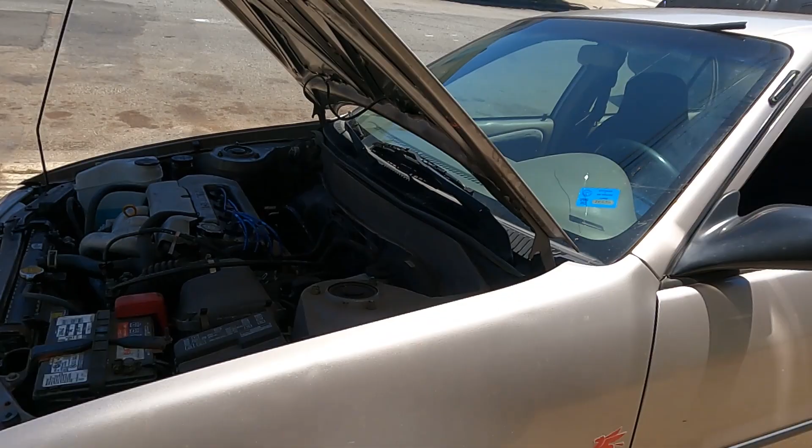Today I'm working with my brother's car. It's a 1998 Toyota Corolla CE. This is the car. So basically on this one I'm gonna replace the power steering pump and also the high pressure power steering hose right here. This one right here is the whole assembly, and the power steering is also leaking all the way down there. So I hope you guys can see it.

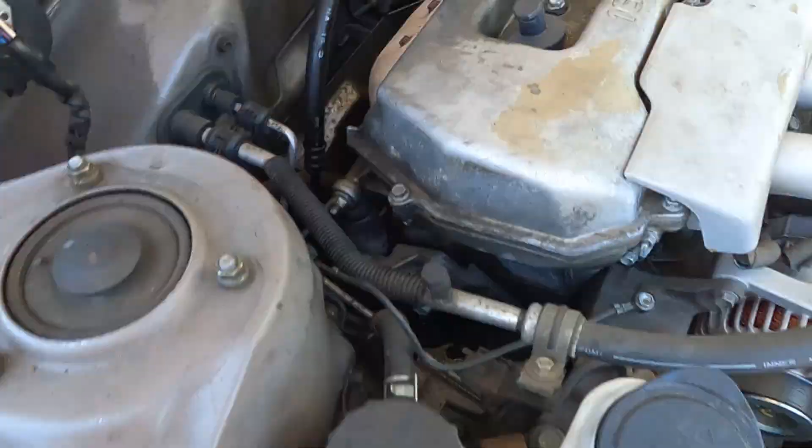Right now the car is hot, so I'm going to let it cool down. First, I'm going to take out the heat shield for the exhaust and also another heat shield from the firewall down here, so I have access from here, and then you'll see all the parts. Next up, I'm gonna loosen the nut or the bolt right here that's connected to the rack and pinion.

Okay, and I'm going to show you the parts. This is the pump. I got it from AutoZone. This is the part number right here, and here's the whole power steering line or the high pressure hose, and here's the part number from Toyota. This is the whole assembly. They don't sell just one piece. They're really expensive, guys. And here's the part number. I'm gonna put everything in the description later.

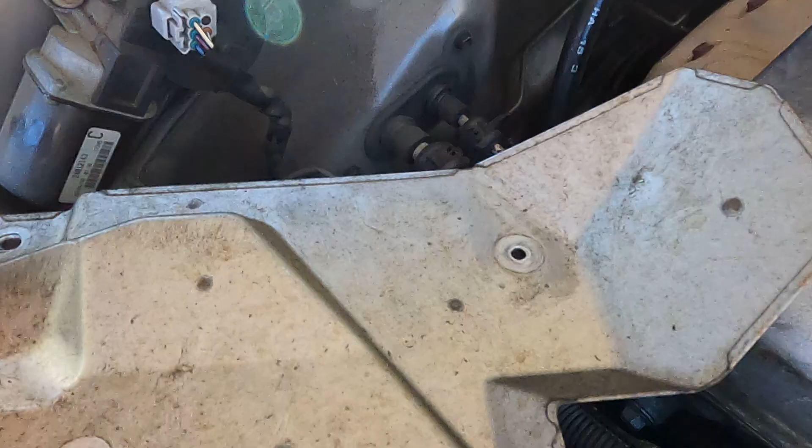Alright guys, this is 10 right here, down there 1, 2 and 3 on the bottom. I had to take it off. Okay, so now I take this one, the shield, and there's another one. So 1, 2, 3, 4, 5. So there's like 2, 1 and 2 right here. Those are the bolts for this exhaust heat shield, and this is 12. Alright guys, so now I took off the heat shield down here.

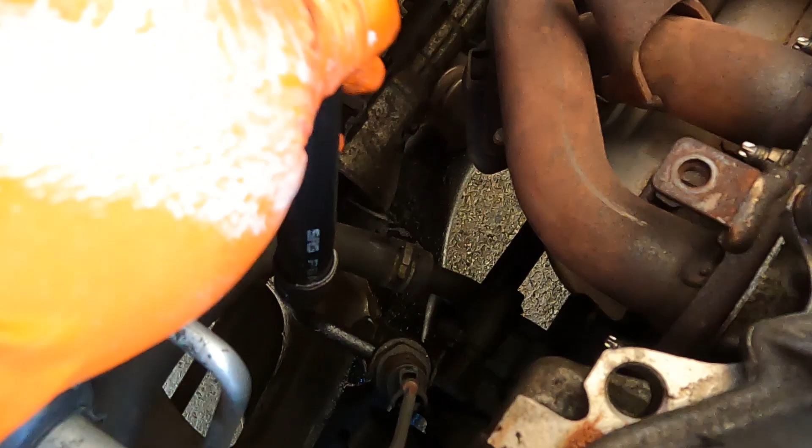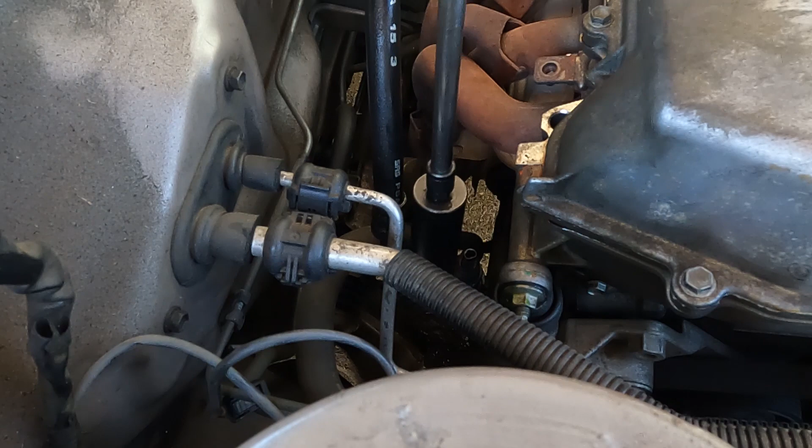That's one. So now unplug this sensor right here and loosen the nut or the union bolt, and then you can take off this one. Just be careful because sometimes they might get brittle. This sensor right here, put it on the side, and then I'm gonna find out what's the bolt size for this one. Hope you guys can see it. The size for the union bolt is 24. Okay, it's 24. Trying to get my long ratchet so I can break it. Okay, now it's broken.

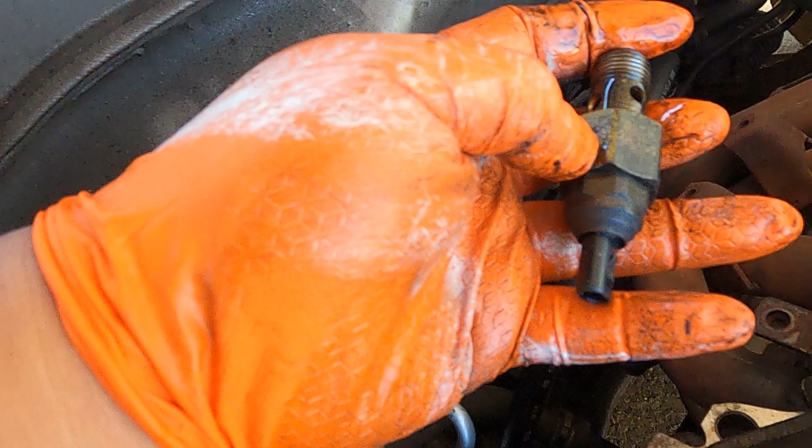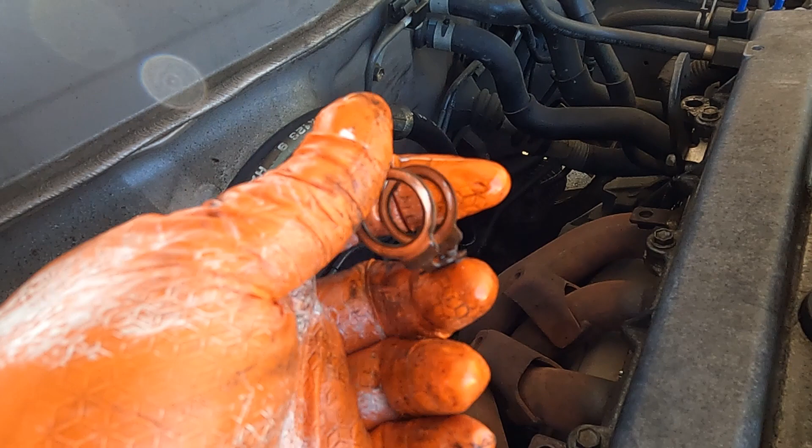Get your pan ready underneath because it's leaking. So I'm getting the union bolt right here, that one right there. Get your catch pan ready. Okay, that one right here is the union bolt. I'm gonna find out also what's the torque on this, very important. And then on here, very specific. This gasket right here, it's the O shape right here. It's only one time use. The dealer told me, so I got this one time use only, copper.

Now I have to disconnect these hoses. It goes to the reservoir right here on the bottom, and then on that side I have to disconnect only one side. I have to disconnect the bolt or the nut. I forgot what they call it, but first I have to disconnect this hose first. And then next up I have to take off the belt. Okay, that one. Alright guys, gonna take off the clamp.

I have to put a little bit more of the WD-40. Then break that in, take it off the hose. Okay, so now I take that off, move it as well, so it's not in the way. There's the bracket down here, and then one over here, so it's not in the way, it's not gonna bother me. There's a 10mm bracket down there. Now it's all messy, and then the bolts for the pump are underneath. There's two, so the head is all on this side underneath the exhaust manifold.

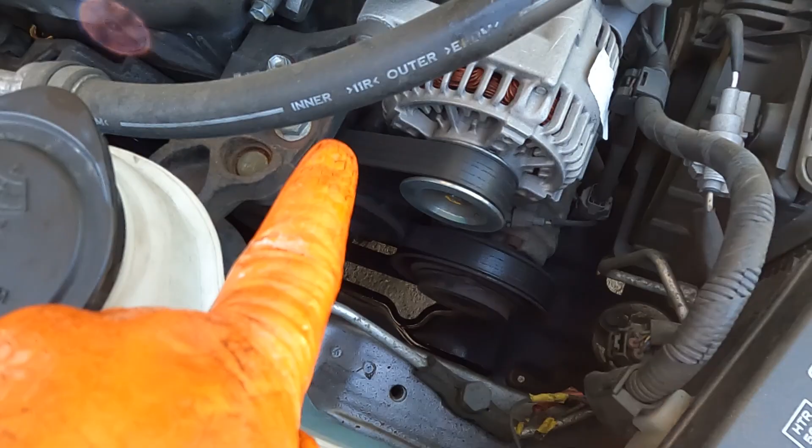Okay, what I'm gonna do, I'm gonna take off the belt first. So I'm gonna loosen the tensioner first, and then take off the belt. And at this time it's better to check the tensioner. So I heard this one, the pulley, did you hear it? It's not supposed to make noise like that, meaning the bearings are already worn out.

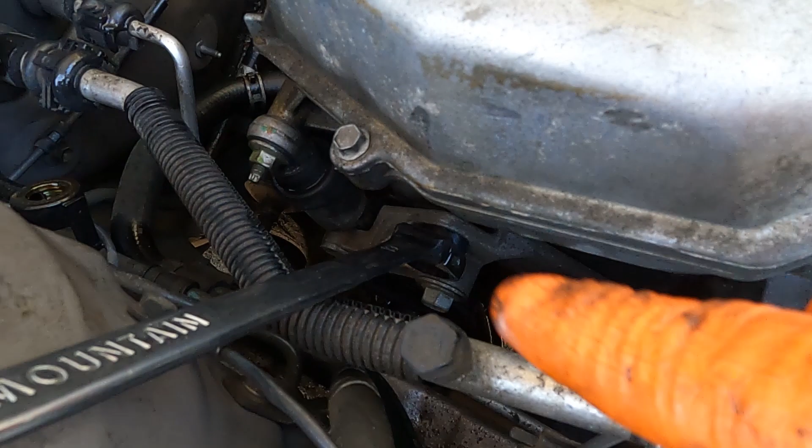So this tensioner is expensive, it's about $100 something if you get the whole kit with the belt on it. And then check the water pump, if it's gritty or if you feel vibration or something. That's the best time to check everything.

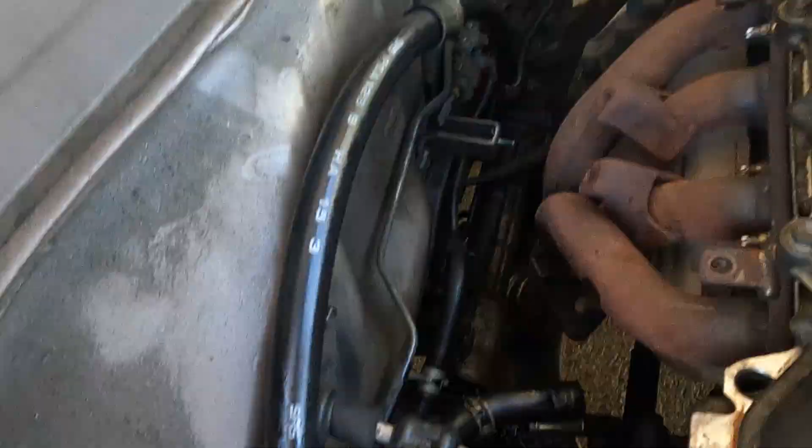And now moving forward to the next one, you have to loosen the nut over there. I think it's 17 or 18 or 19. I will show it to you, but first I have to take this one, just to not be in the way, or I can just tuck it in somewhere. Maybe just like, there you go, maybe just like that. Okay, so the whole kit is like this.

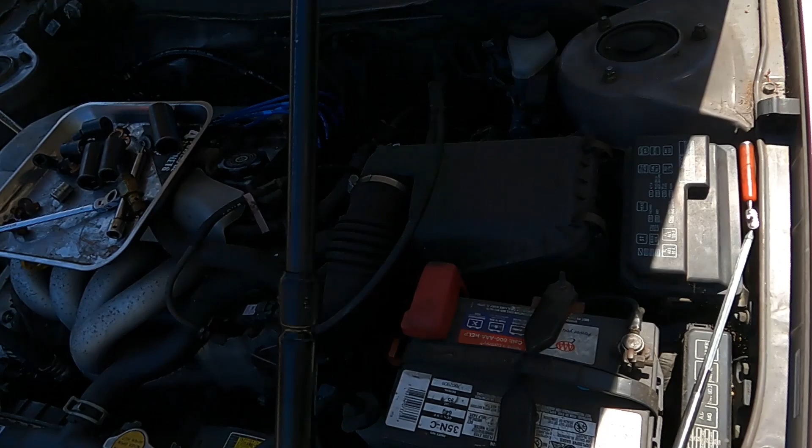So you get the long one that's connected to the rack and pinion, and then there's a pipe right here. So you just have to disconnect the hoses from here, and I'm gonna show you where that is. It's from here, that pipe right here. One, disconnect this hose, and another one down there, disconnect that one. I'm gonna get my flashlight so you guys can see it. I know there's the glare or the shadow, but I'll show it to you.

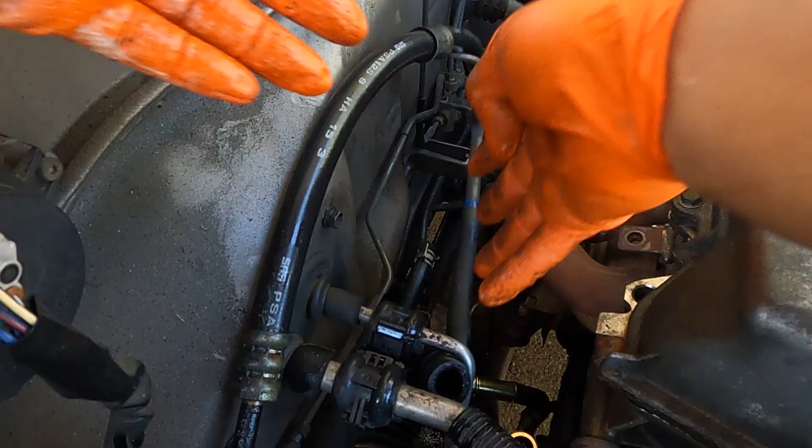First we have to disconnect this one, take off the clamp. Disconnect. Okay, come on. Okay, that one. Now there's another one down there. The valve cover is still kind of hot, so I just have to get it in. This piece right here, I hope you guys can see it. This piece right here,

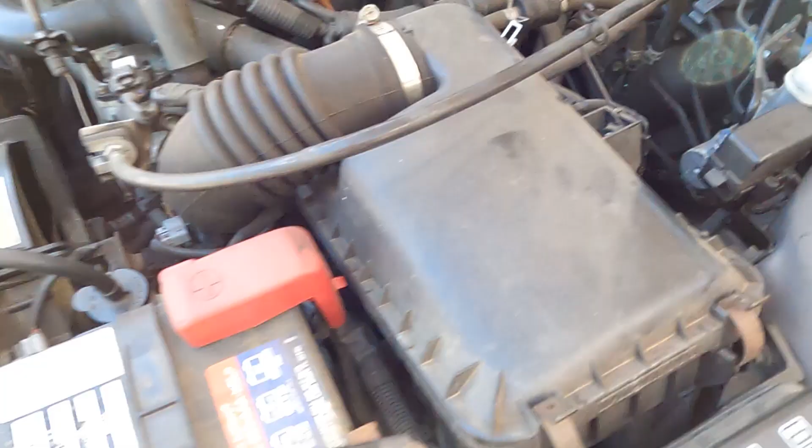that piece right there is 17 millimeter. I have to break it in. It's kind of tight, but I just have to look for some ways to break that in. Okay, and then it's easy, take it off. So for the power steering hose, there's three 10 millimeter. There's one right here, and then there's two over there. Once you break the nut on the, oh no, from the rack and pinion, sorry. Once you break that in, it's easy to get the power steering hose assembly.

And now moving on to the power steering. This piece right here, it's already loosened. So now I have the, oh you mother, I already broke it in. So now I just have to work it out with the midget wrench, just to work that in. Once you break it in, so you can break it in with a regular size wrench.

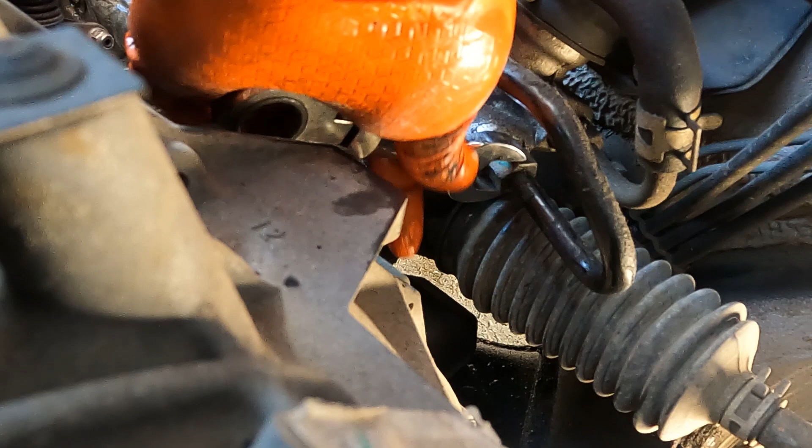Still. Once we get this, I forgot what it's called, the bolt right here. Come on. I have my angled one. Hopefully this whole, no, it's too long. I mean the midget one is the perfect one.

Still, come on. So once this one is off, we can just take it off. There you go. It's already off.

First, before we take off this one, I'm gonna loosen the three 10 millimeter here that I have to take off. This hose. I just have to take that off. So this one, one 10 right here. Okay. Two more, sorry. One right here. This hose is kind of giving me a hard time. This one right here. So what I'm gonna do, I'm gonna take this one off.

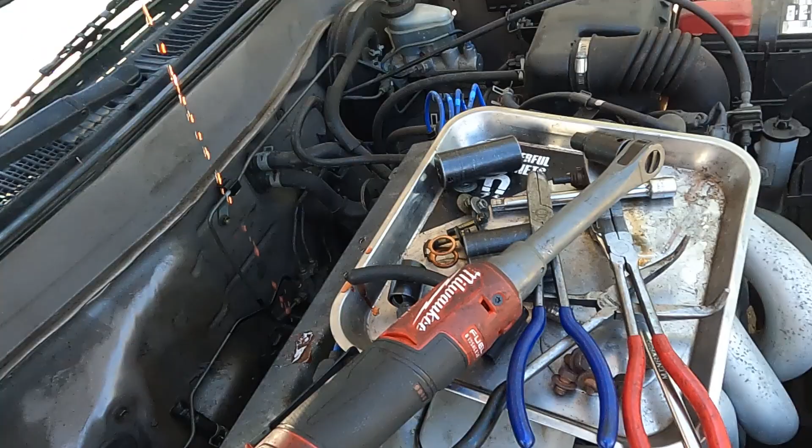Okay. And then just have to take that off, and then get to that. Okay, I see. There you go. Now I have to catch the power steering, right here, the whole assembly. I'm sorry, it's only two brackets for the whole assembly. Oh shit. Okay, to be quick. One right here is the whole assembly.

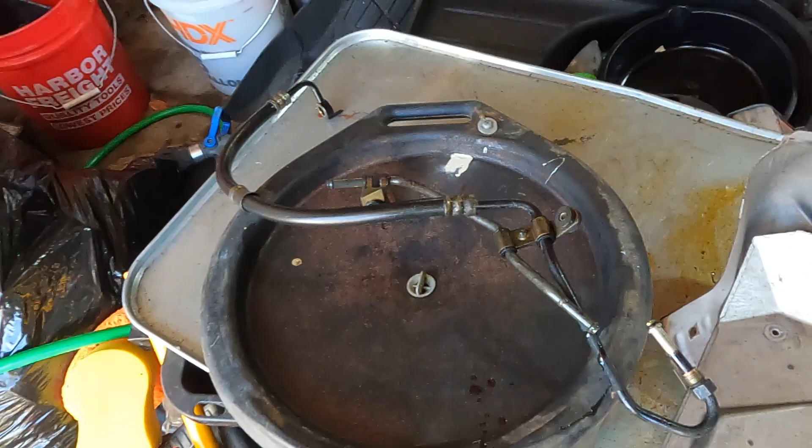Now I have to clean it, jack up the car, and then work on the actual power steering pump. Okay, this one, and I'm going to spray some cleaner here later once everything is clean. Okay, so I'm done pulling the power steering pressure hose. Before I jack up the car, I'm just gonna show you there are only two more bolts holding the power steering pump. Before I go down there, I know there's a lot of fluids that have been leaking.

Don't forget to get some eye protection.

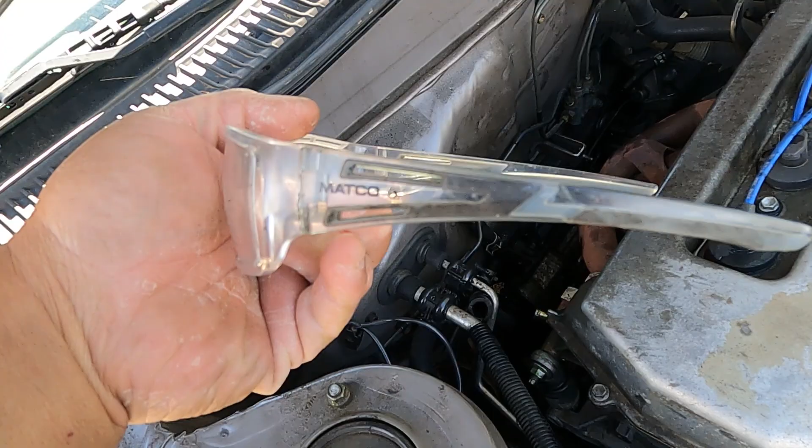All right guys, let's just go back to work. Let me just jack up the car.

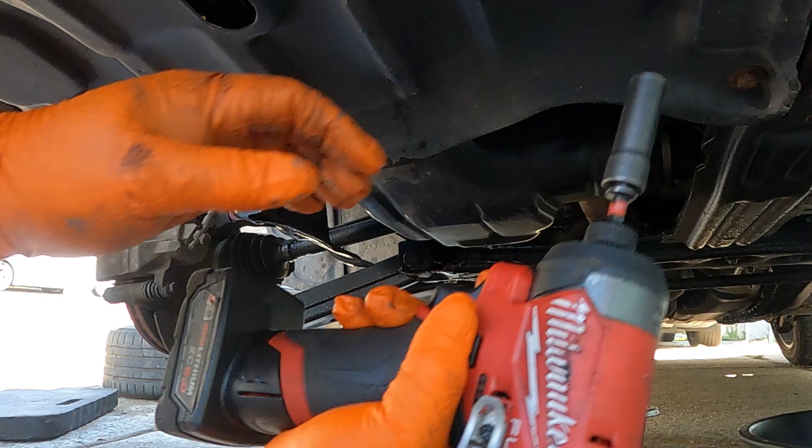Alright, so on the bottom, I just wanted to take off this plastic cover. So you got them right here, 10mm right here, so I got more space to work on. Two more.

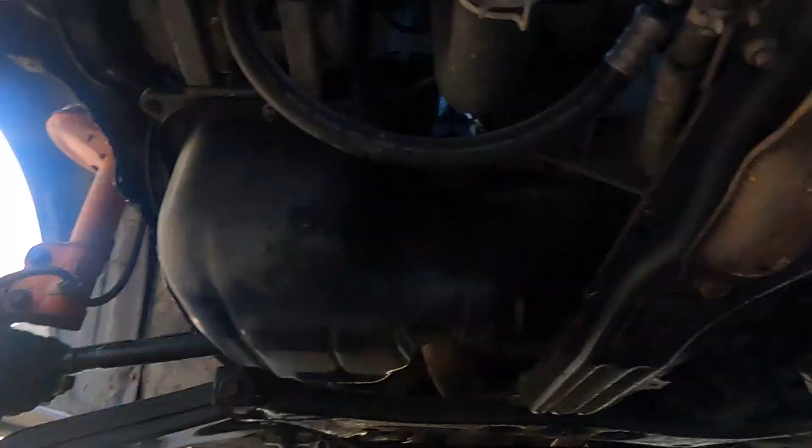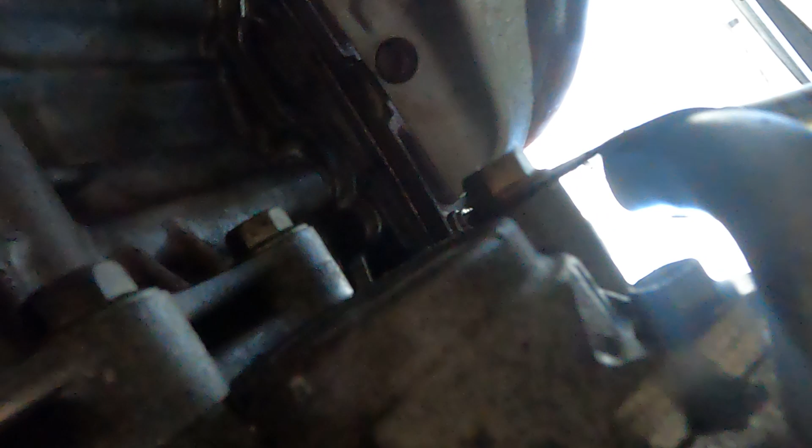Check it out. Over here there's one bolt down here, and then I know there's one bolt up here. I think the head is all the way to the end. Okay, it's right here. You can see it. One over here, one here, one over there. Okay.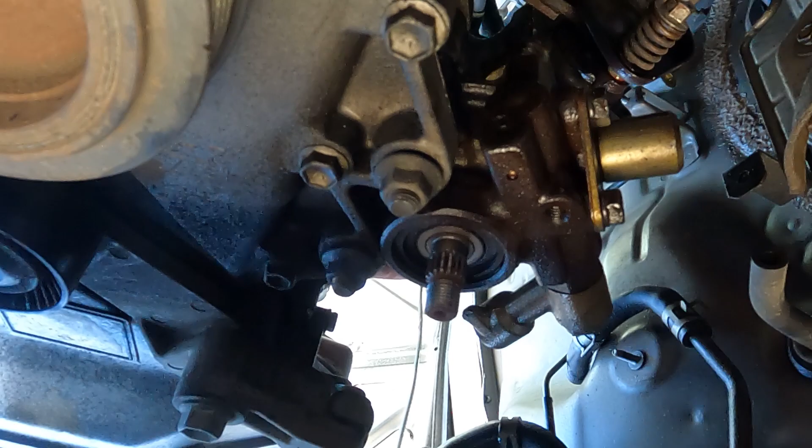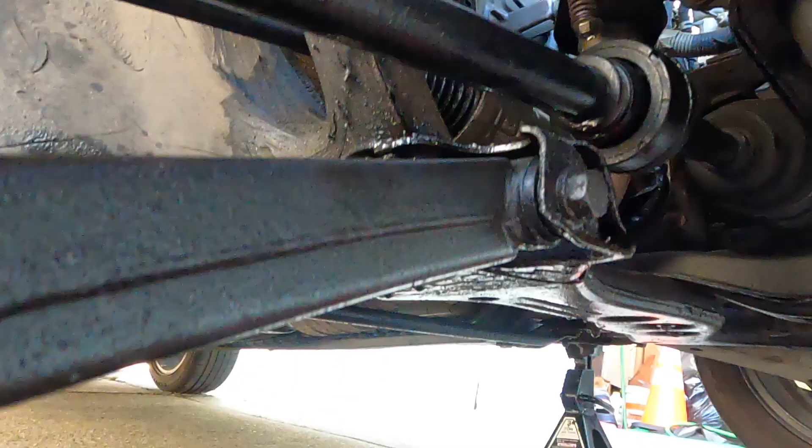Alright guys, so this is what I'm trying to show you. One long bolt, there's the second one, and then there's the nut right here, 14, and then the pulley 17. Let's see if I can. Okay. Oop.

Now I know I'm ready to take out the power steering pump. I think let's just leave it tight, and then be careful. Might have some fluids, like the power steering fluid. I don't know why I cannot get through. Come on.

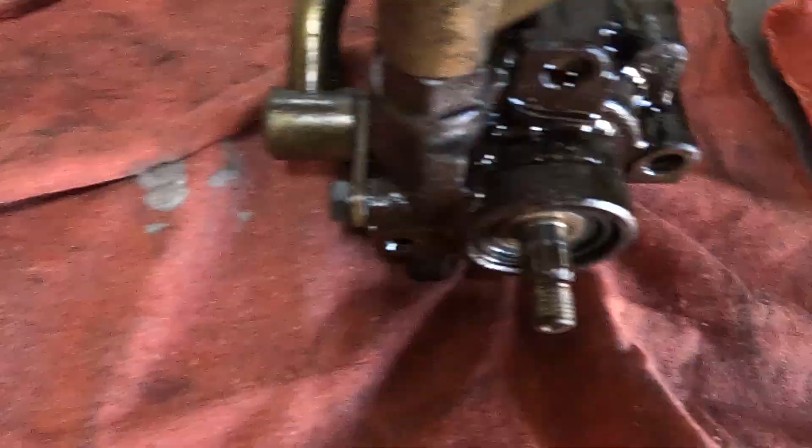Okay, here we go. And I'm gonna show you the new one. Okay, so here's the old one and then the new one. So first I have to transfer all the piping, this one and this one, from the old one to here. I'm not sure what's the torque for this one, so I'm gonna check all data first before I transfer, because I don't want to waste the job or the gasket from here.

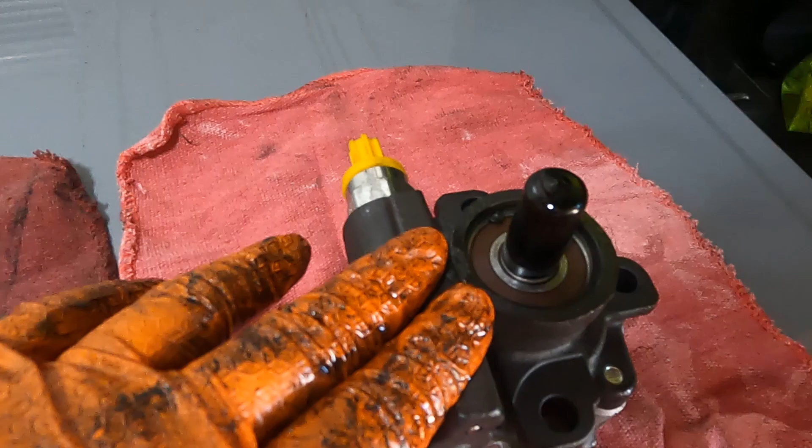AutoZone sells the whole assembly with the piping, so basically plug and play. This one is cheaper. It's like 100 plus, compared to the complete assembly with the pulley and everything, which is around 300 plus, I think. I forgot, so I'm gonna check that too on the link, where you can get the whole assembly versus just the bare power steering pump.

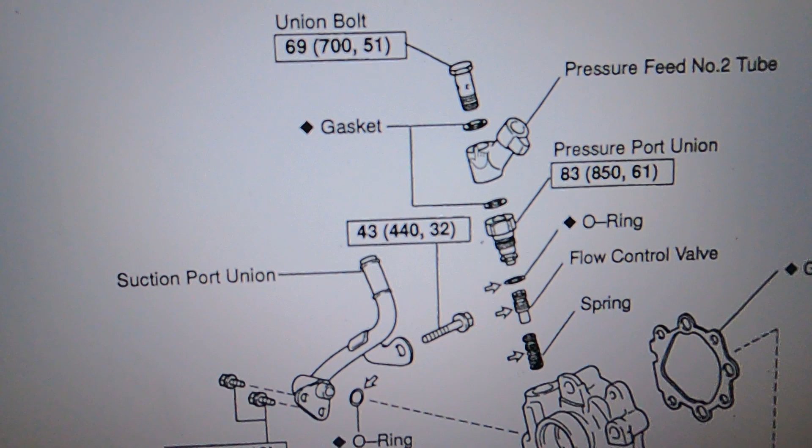Okay, alright guys, so I found the torque. The pressure feed tube number 2 right here, and then this is the union bolt. From here it's about 51 foot-pounds, and then the suction port union tube is right here. There's 2 bolts right there, small ones, 10 millimeter. I think that's 10 foot-pounds, and then I have to replace the O-rings and stuff.

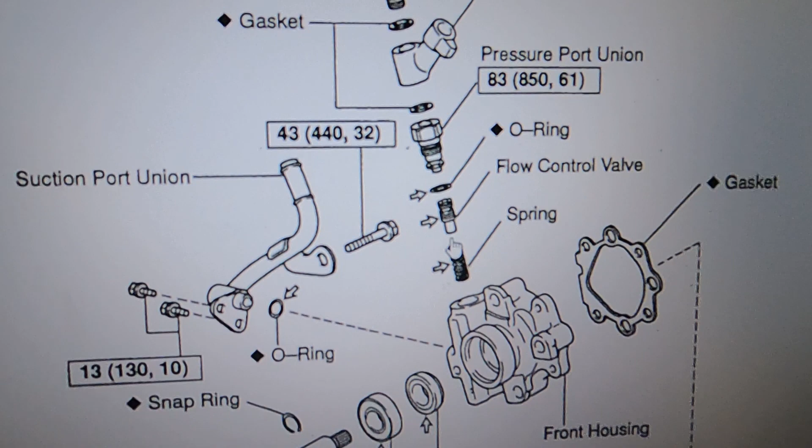So the pump I have already has this pressure port union, so I don't have to worry about this part right here. The only thing I have to worry about is this part right here, this part, and then the union, and then these are the gaskets.

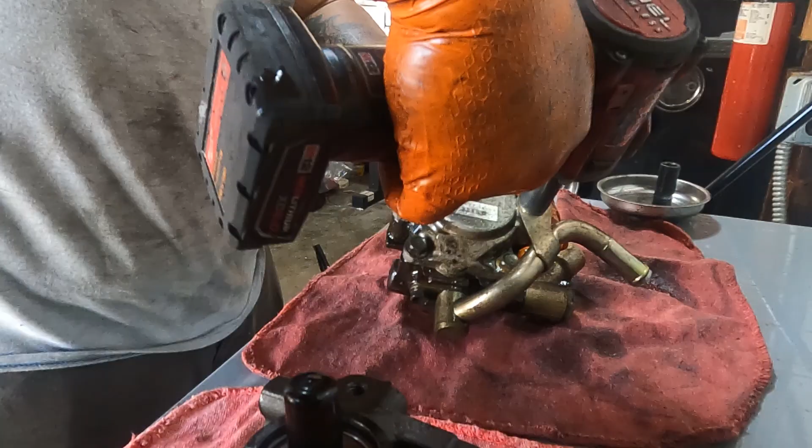Okay, alright guys, this bolt right here is 14, and then the 2 bolts right here are 12. What I'm gonna do first is gun this one, okay, and then gun the second one. Get this one. Oh, it's a long bolt. Okay.

I don't know how to take this thing off. Oh, here you go. You just wiggle it a little bit. Oh, and also you have the O-ring over here. Okay, that one. And I think this one is either 19 or 21. Okay, so the bolt from here, the union pressure port, is 23.

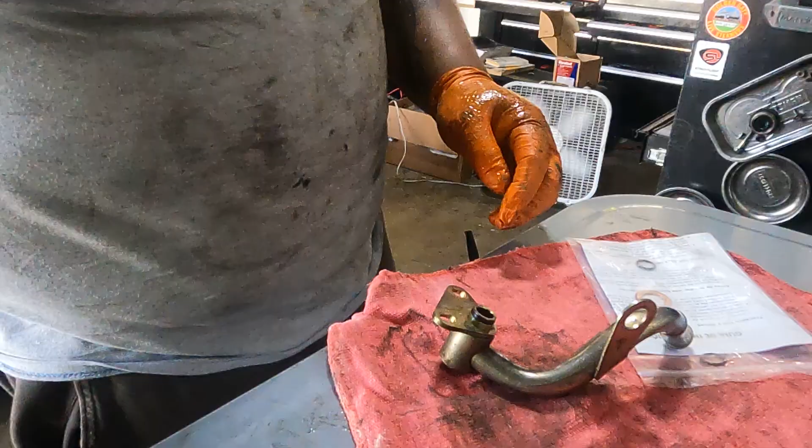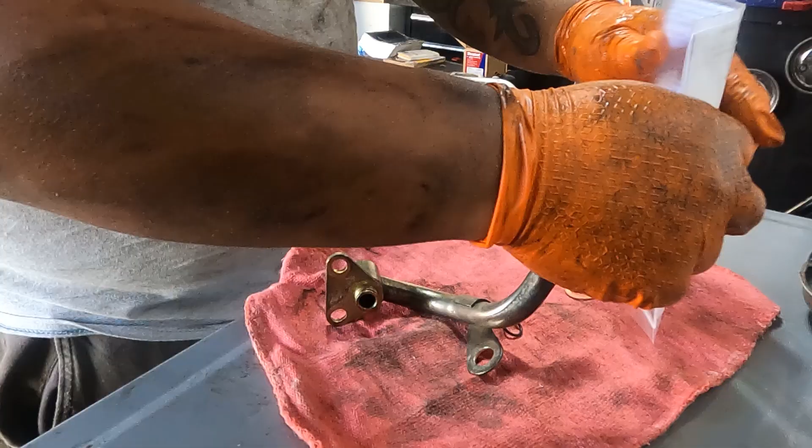Alright guys, so first I'm going to take off the old one, and here are the replacement washers and O-ring gasket. Taking off this one, the old one. I think they're all the same. Both of them are the same. Okay. First I'm gonna put some power steering fluid to install this one. Okay, that one. And then there's two more. Going to save this one for later.

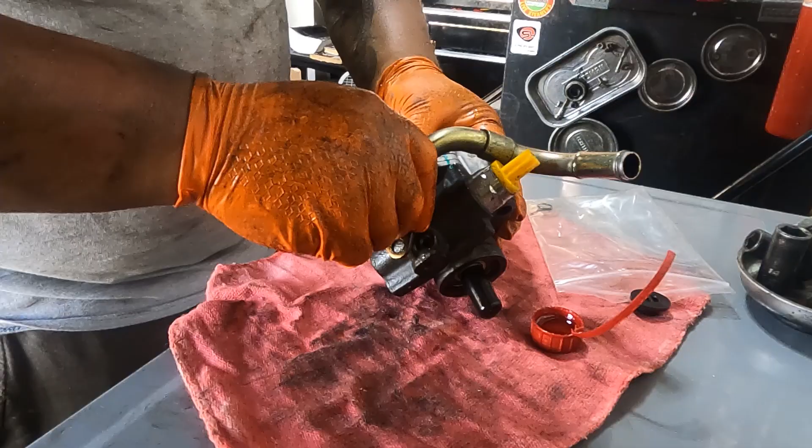Alright, so installing the new one, I'm gonna put the fluids on. Because they're new, I have this small rubber hammer. They're good. And this one, put that. And then install the longer one. That's 14.

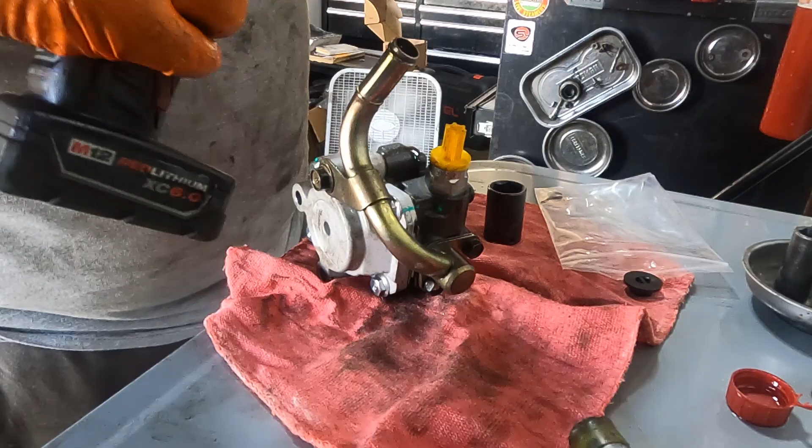Okay, that's it because it's only 10 foot-pounds. Okay, I got the bolt union. Just gonna put a little bit of power steering fluid. Put it in this one and put it in the center.

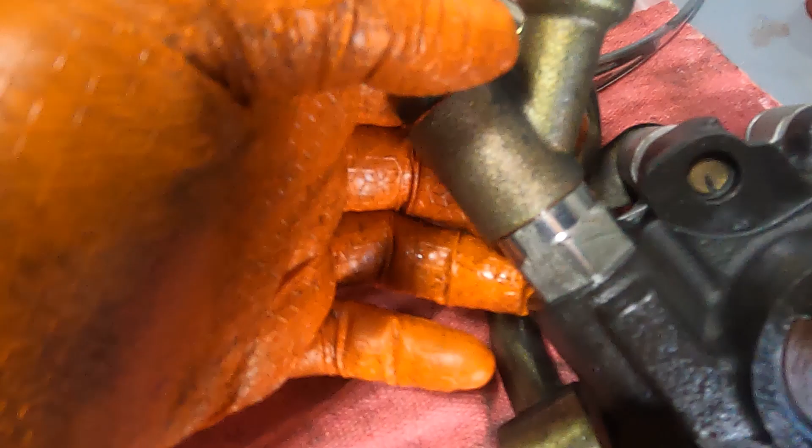Okay, so this union bolt right here is 50 foot-pounds. If you're working by yourself, I'm gonna show you how to torque this one. Okay, so get some towel to protect your power steering. Get the pump like that, and get your torque wrench.

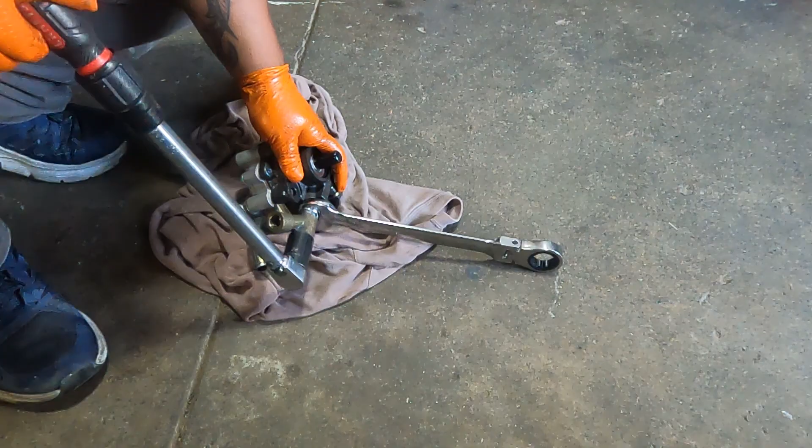So this one is the counter one. And then I already torqued it. In that position you can do that, and then you can torque it slowly until it clicks. And also you have to get this one straight to make sure you don't have a hard time installing the hose later.

Okay, before I install the power steering pump, you just have to lube this part to make sure it's a lot easier later to put the power steering pump in, and then I'll clean it later. That part right there. Okay, so everything is the reverse order. I hope you guys can see it. Trying to install now.

Okay, so now if you guys can see these two divots right here, these pins are kind of offset, so I'm trying to file this with the sandpaper so it becomes smoother and it's easier for me to install the new one, and then put some WD-40 to make it smooth and easy to slide.

You might encounter this. I know you're gonna encounter these two parts right here, the two pins. I don't know if they're bolted in or pressed in. I just don't want to mess up more. I'm just trying to file it, make it more shiny.

Alright guys, a little bit of an update on these two pins. These two pins right here, you can punch them out. I tried punching it just ½ inch, and once you punch it, it worked. It was just too tight; it was pushed a little more inward instead of outward. So push it outward, so that way the power steering can fit on this slot right here.

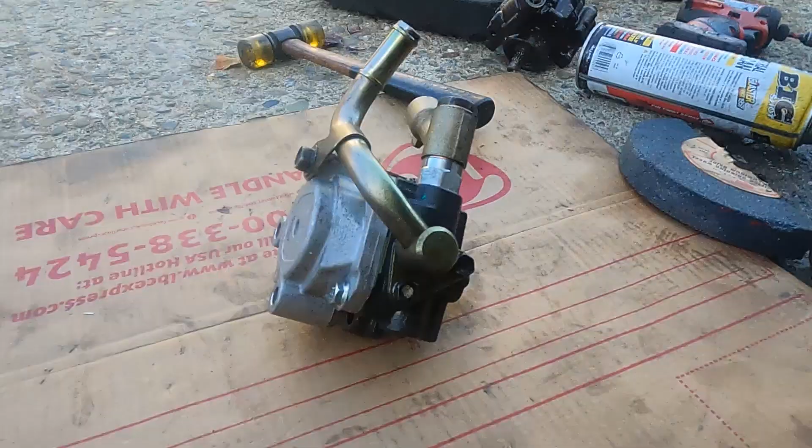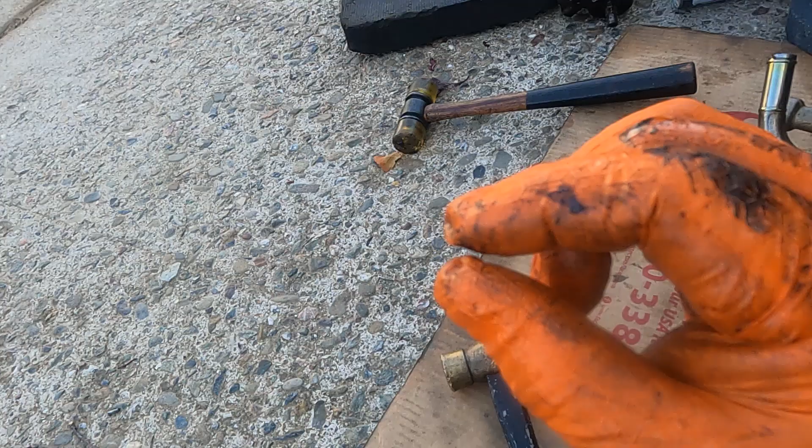So you can punch it using your hammer or whatever. Just move it ½ an inch and then you'll be good. This is the punch I use, the big punch right here, and then I use this brass hammer. Just really on here, to push out the pin, and then you'll be good.

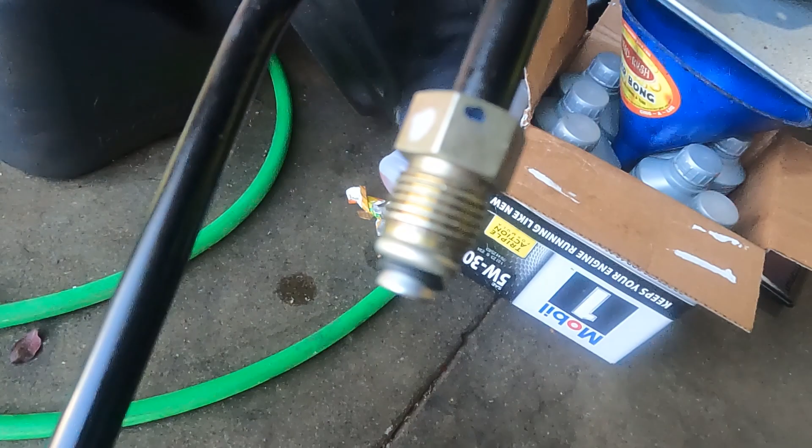Now I'm upstairs to do the hose assembly. Alright, so the new power steering hose assembly, in the tip there's the gasket right here. Before you put it in, soak it with power steering fluid. It's easier. And also on the threads, put some WD-40 and hand thread first before you mess it up.

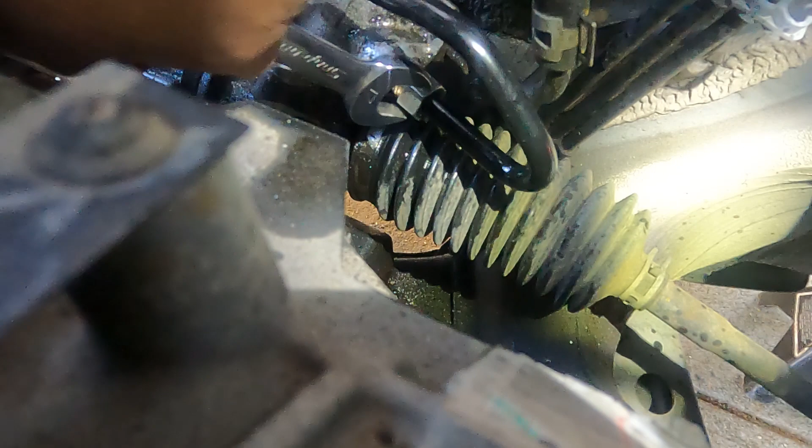Okay, so since I got this one, slowly. So here you just have to be careful, don't rush, because these things are expensive, especially this nut right here. Once it's stopped, bolt in the other bracket so everything is lined up, and then spray a lot of WD-40.

Sometimes this job right here will test your patience. Come on.

So now they're almost there. I just have to, okay, now it's tight. I'm going to get all the brackets on this one, so make sure everything lines up before I tighten the bolt down. Alright guys, so I got this one bolt down here. Oh shit. Down here. Get that. One more down here. Okay. Everything's tight.

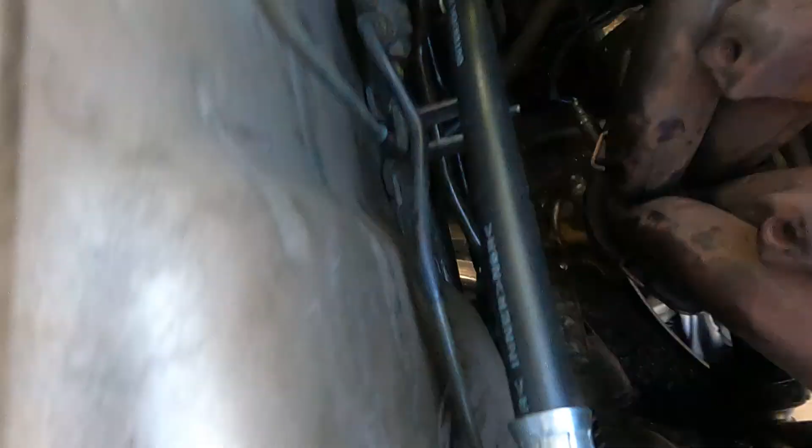That hose down there, I put it over here. I'm gonna spray WD-40. It's easier to put it in. Come on. These holes right down here. Alright, so everything's good. Just have to get that clamp.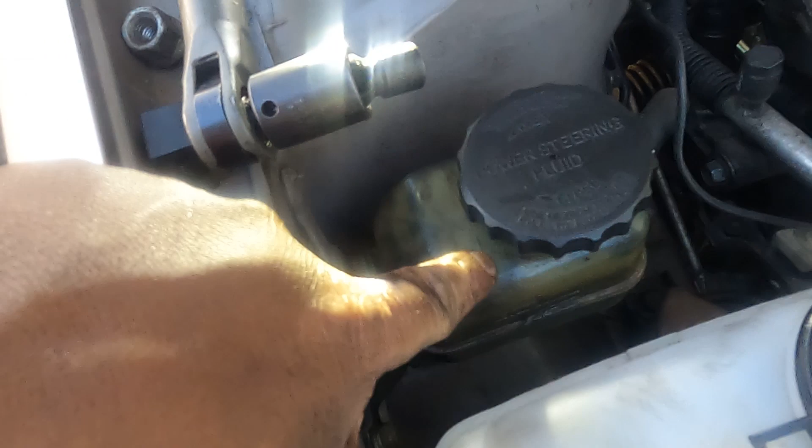Alright, so I'm gonna replace this power steering reservoir. So there's two bolts, one and two right here, and also there's two hoses. Okay, but I'm gonna take out this washer fluid reservoir. Okay, so I installed the new one, I got it from the junkyard. It's cleaner than the other one. The old one, all the fluids get sludge on the inside.

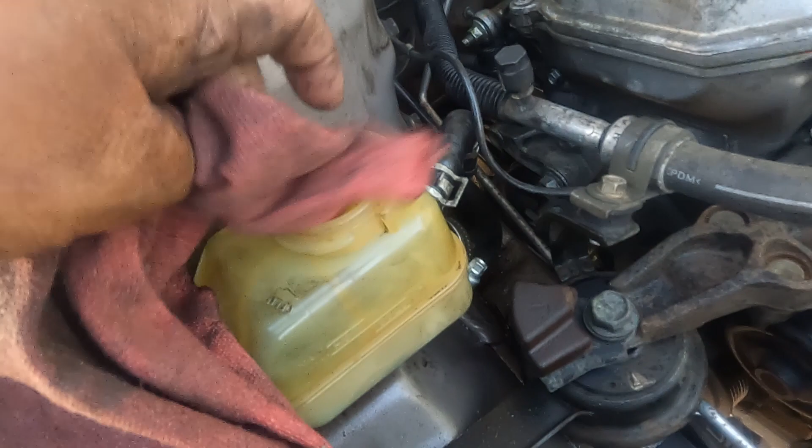Bolt this one, I mean put the clamp, this one too, get a 10mm. Gonna install the washer fluid reservoir, everything. I'm gonna put the sensor over here, the union one, and then put the hose. Oh, jeez. Put the hose back. Everything's fine. One more, the sensor, and torque this one to 15 foot-pounds with the washer.

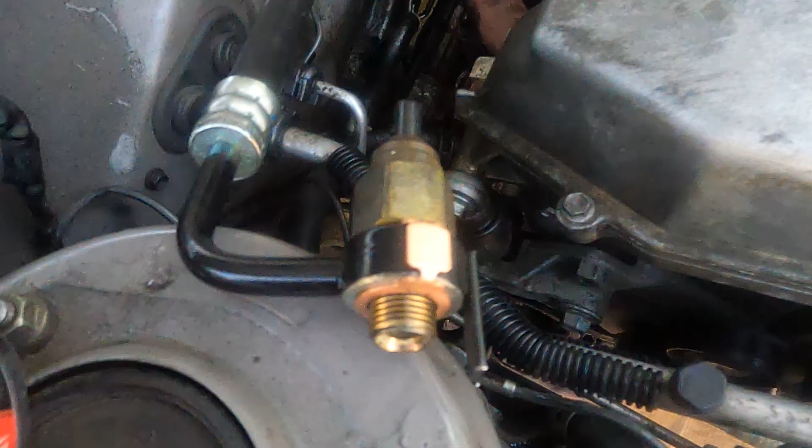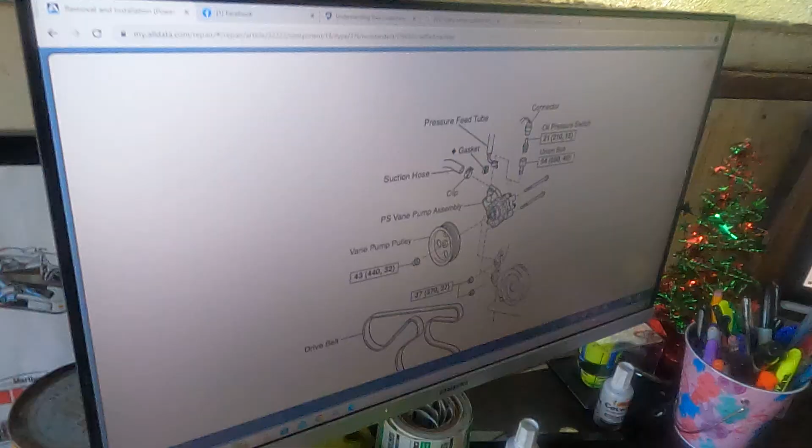So the sensor goes like this. Put it like this, and then this one, and then this part is 15 foot-pounds. Let me double check again. I know it's 15 foot-pounds. First you have to hand thread it. Okay, hand thread, and then torque it to 15 foot-pounds. On the ALLDATA, this one right here is 15 foot-pounds.

So I'm gonna use the extension, so I might put 16 or something, but I'm gonna stick with 15 foot-pounds first. Also the size for that is a 24. Let me just get my torque wrench, set it up to 15 foot-pounds. Okay, that's it. But I'm gonna double check first with the ratchet just to make sure, because that's only one-time use.

Okay, and then get your sensor. Okay, I hear the click. Now put the belt and start filling up the fluids. Okay, I'm not gonna put everything back. I'm just gonna start the car and then check the last part right here. I have to tighten this one, forgot that one. Okay, so everything's all done. I'm gonna get all my parts, fill up the fluids, spray some cleaner before I start it just to make sure it's all clean.

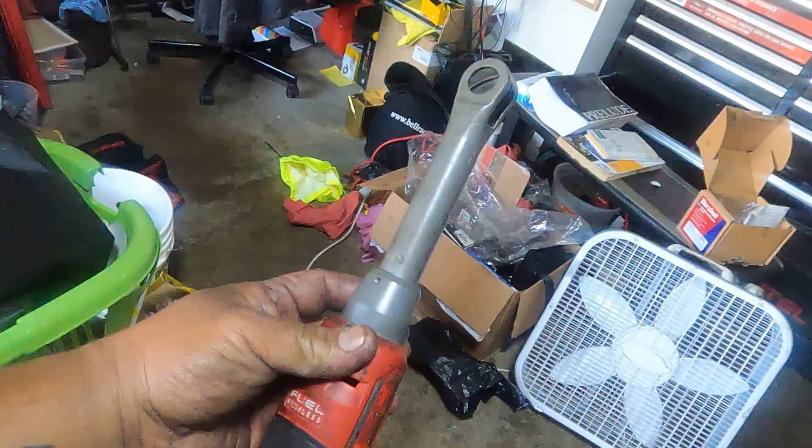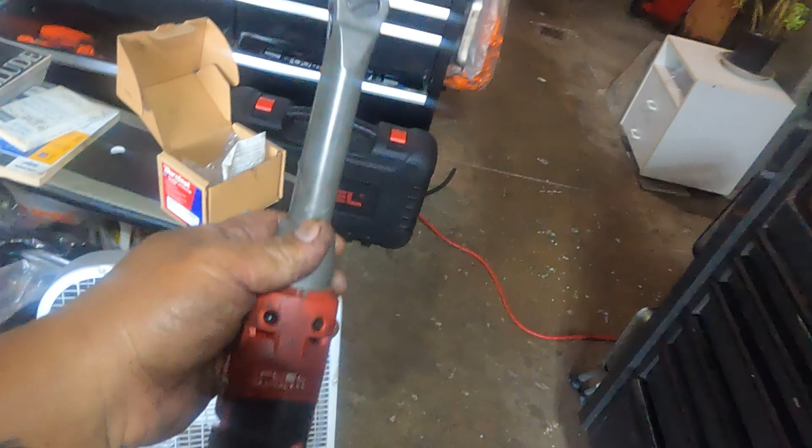Hi guys, just to add, if you are working in a tight spot, this is a good tool. I saved up and got this one, a little bit expensive. It's a Milwaukee brushless extended neck ratchet. I forgot the specific name, but this one is a good one. They're strong. For sure it will help you a lot in tight spots.

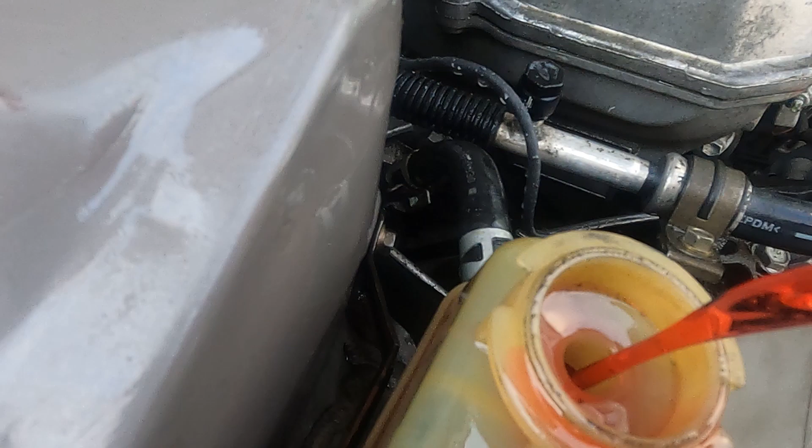Okay, now I'm gonna clean the car first because it leaked a lot of fluid, so I'm gonna put some Royal Purple and then clean up before I start up. Okay, so the final touch, the car needs Dexron, either regular or full synthetic, as long as it's Dexron 1, 2 and 3. This is transmission fluid. And then I'm going to get the fluid to circulate. I'm not gonna start it, just rotate the steering wheel.

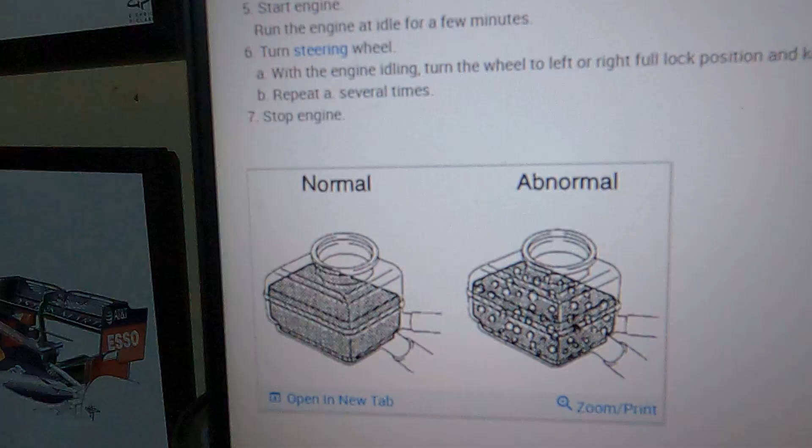Alright guys, so I'm done with the Corolla, but there's a problem. The steering wheel is hard. I think I did not bleed it right. So I read the ALLDATA. I'm gonna show you the procedure right here, because I saw a lot of bubbles. Hold on, I think my camera is blurred. So this one right here is the abnormal one, because I saw a lot of this when I opened the power steering reservoir. And here's the normal one, no bubbles.

And here's the procedure. I'm gonna take some time so you guys can read this one. It's coming from ALLDATA. So I did the bleeding procedure wrong because I turned the steering wheel too fast. It has to be slow from lock to lock. I'm gonna zoom in right here so you guys can read it, if you don't have ALLDATA or the Haynes manual.

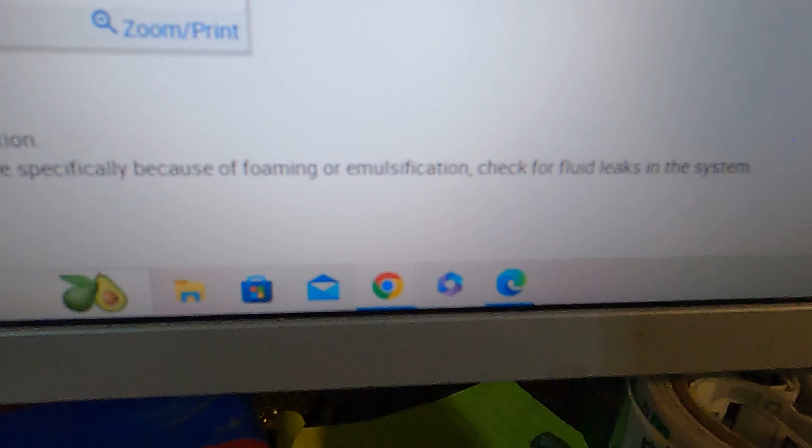Okay, so I'm gonna do the bleed again tomorrow. I'm gonna try to make a separate video, but today I'm tired. It's night, right now it's 8:30. I don't want my neighbors to complain, but I'll see you again for the next video, guys.